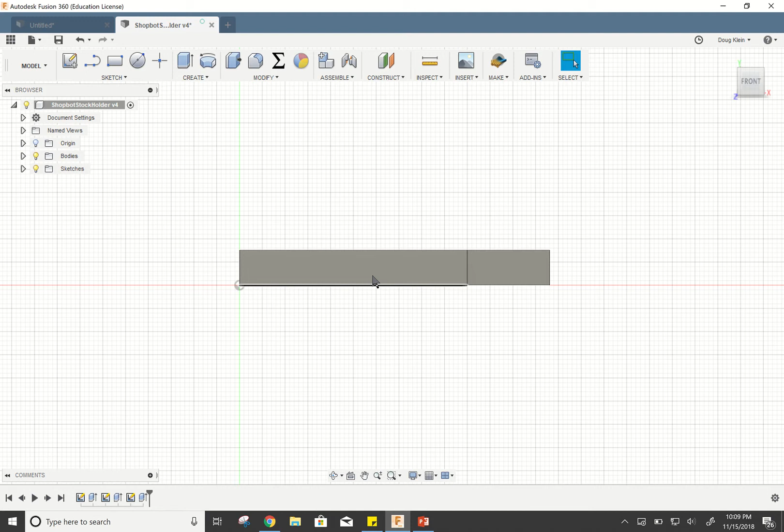We're going to develop a profiling operation for the Shopbot. To do that, I've drawn out my parts, and I have a 3/4 inch piece of plywood that I'm going to cut these parts out of. To do that, I'm going to make sure that all the parts started from the same plane and were all extruded the same distance just by looking at it from the side.

I'm also going to check to make sure that each of the extrusions are the same thickness as my material. And so 0.75 is my 3/4 inch plywood. I'm going to add an extra hundredth on that. And the reason is I want the bit to go all the way through my material and just scrape the spoil board as it's cutting along.

The other thing is the Shopbot works differently with the way it holds down material in comparison to our other mills. To do that, we're going to have to add a sketch to the top surface, and we're going to hold it down with screws, which are going to be in locations that we determine.

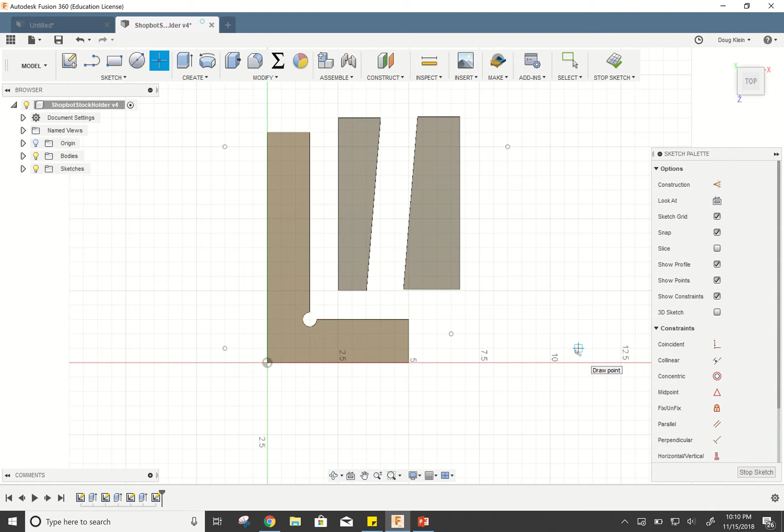It's going to be best to add these points about 1.5 inches away from our material. We don't want to have it be much more than that because we do want the surfaces between the two parts, as in the spoil board and the material, to be kind of tight. Once we have our 4 points that we are going to work with, we can go into our CAM and we can develop a setup for our part.

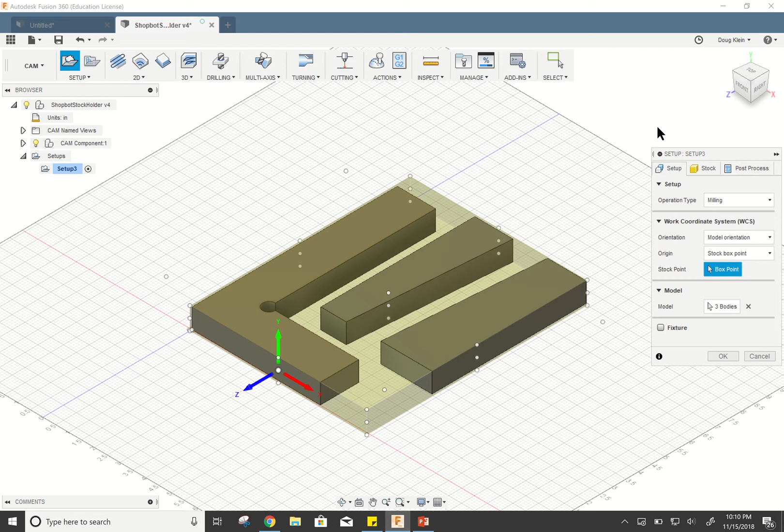To do that, we're going to generate a setup, and it comes out and it has our orientation, which is right like we drew it. And we have our work coordinate system developed right here. And we've got to get it set up so that our Z is going vertical. So we select a plane, which is that one, and it sets my Z vertical. And I'm going to select a point on that box right there as my origin.

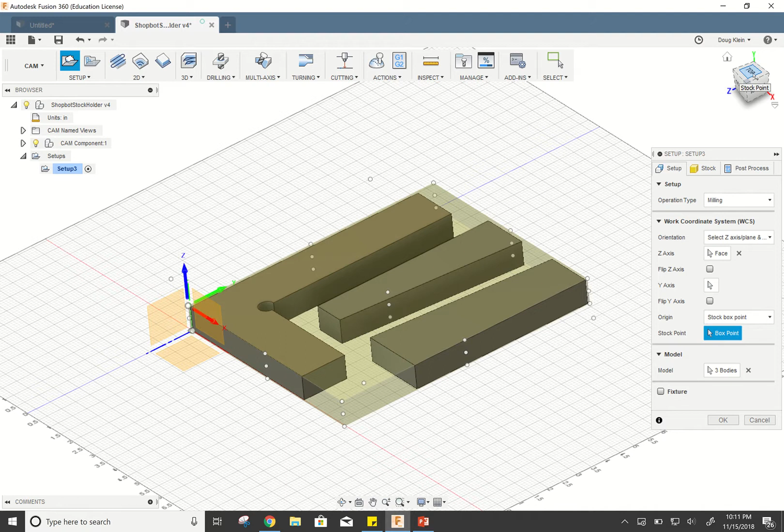Now, if you'll notice, this origin does not include the space that includes my dots. And so I need to move this origin out so that I include these holes where I'm going to pilot later on. To do that, I'm going to go into stock. I'm going to add stock to all sides, and I'm going to add 2 inches to each of my sides here. Maybe 2.5 here.

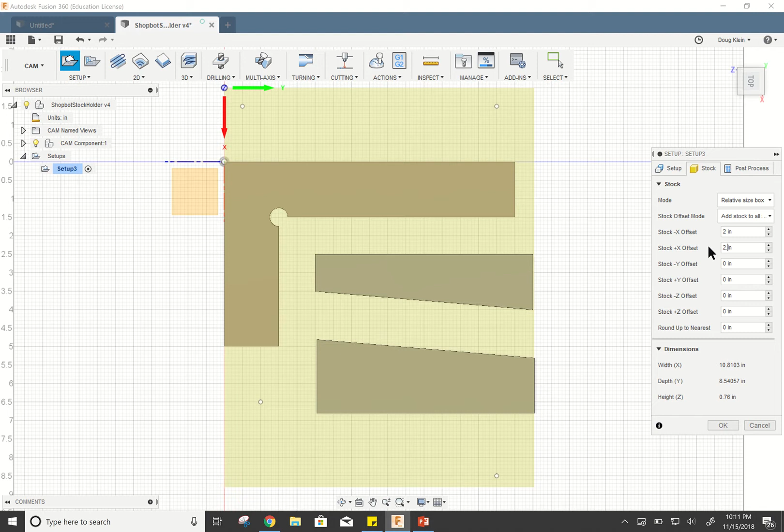Right, I add 1 inch on my Y, 1 inch on my Y, and it's going to tell me down here what the dimensions are of my material that I'm running with. And so I can go out and measure my material, make sure it is my 12 inches by 11 inches before I mount it and take it over to the machine. Once I select OK, this is the space that I'm working with.

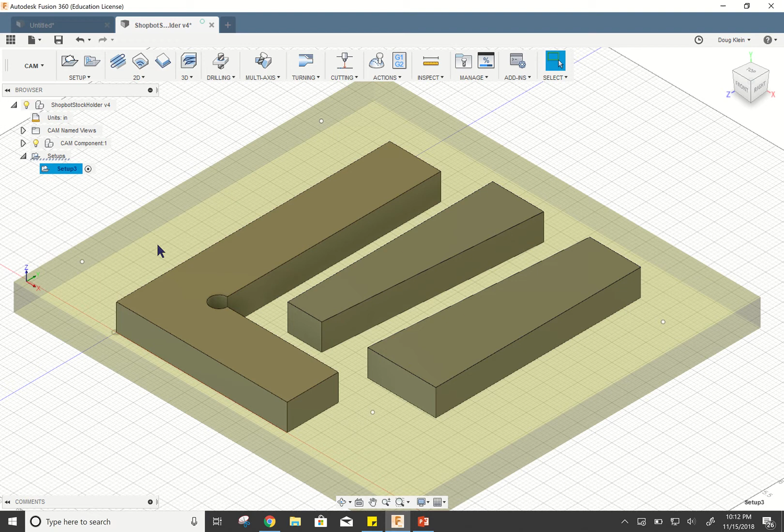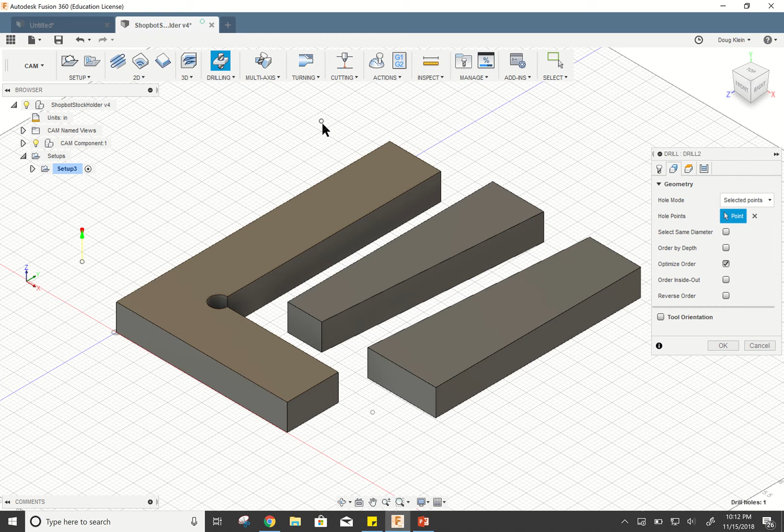And I've got to add some drill marks that are going to go on each of these points. I'm going to select a tool. I'm going to go into my plywood tools and select my spot drill. And for my faces, I'm just going to select points. I'm going to select this point here, that one, that one, that one, and that one. I'm also going to set the distance that it goes down to be -0.1.

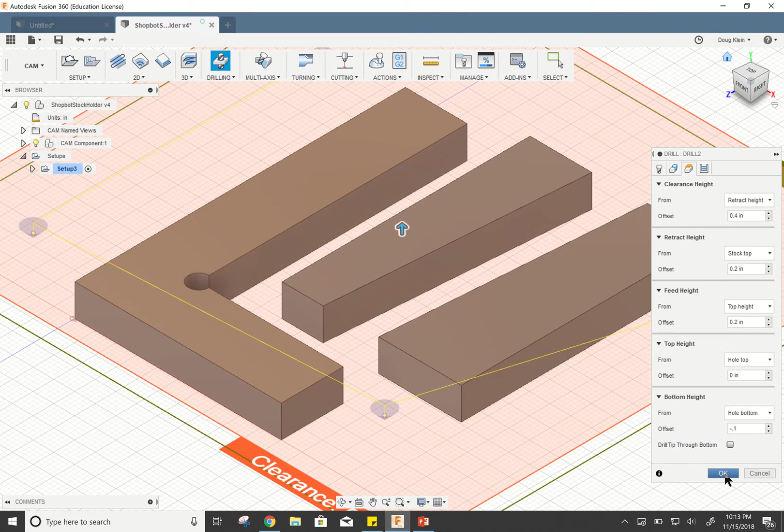And you can see the drill bit going in. If I look at it from the side, I can see that it goes down into the material. I'm going to select OK. I'm then going to simulate it just to make sure I'm in good shape. So we can run that process. See, that's going in, making everything happen, which is a good thing.

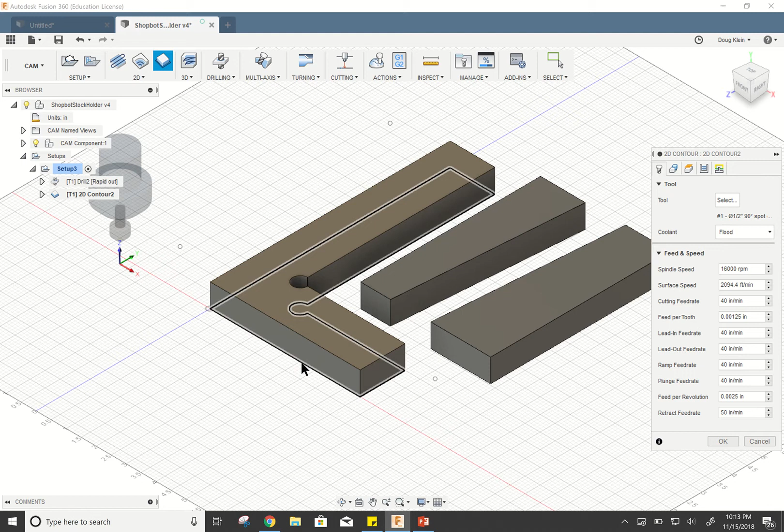Close my simulation. The next process that I want to have happen is I'm going to develop a 2D contour. And so to do that, I'm going to select the bottom face of each of these parts. And then I'm going to go over and change my tool. The tool that we're going to recommend you utilize for a plywood piece is going to be the 1/4 inch flat with a single flute. And that's going to allow for the chips to get out faster. And it's going to cut a little bit quicker for us and make less sound.

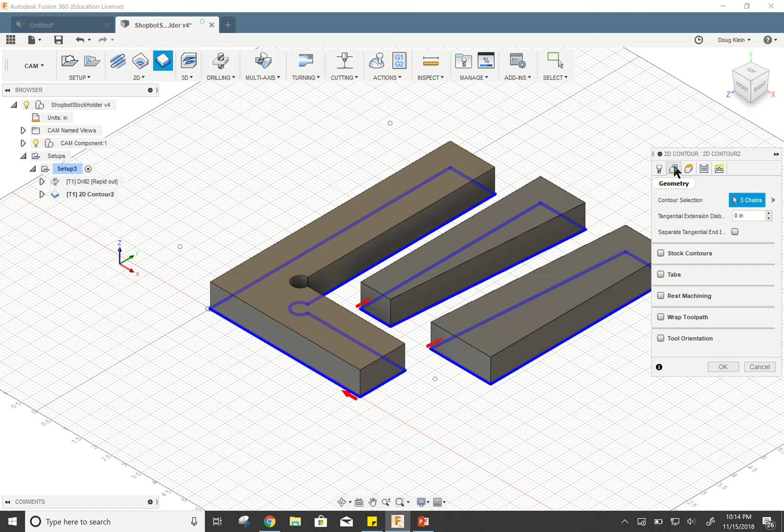I'm then going to look through, add some tabs. And the mindset on tabs is that each of these you're going to have to cut off when you're done, because we're going to cut this part out, and that tab is going to be holding this piece of the stock, and you'll see that better in a moment. But you really want to have about 4 per face. And so let's see here. So 4 inches is way too few. 3 inches is probably just about right. And so we'll be okay with that.

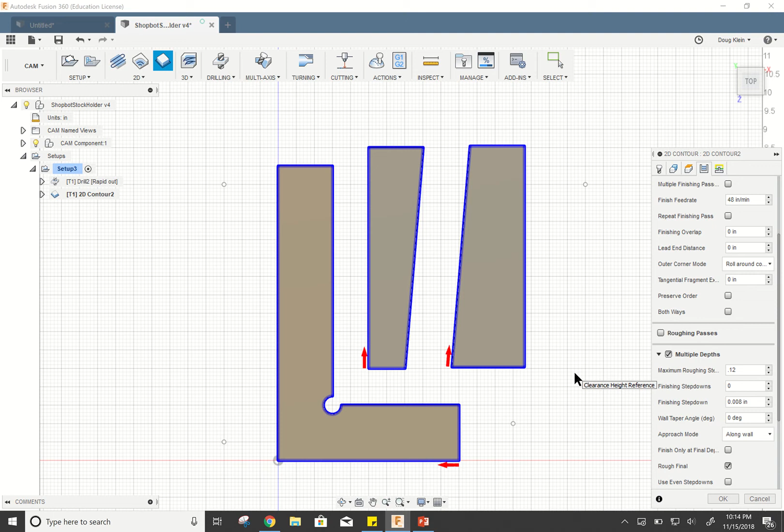I'm then going to look and develop multiple passes. So we don't want to cut all the way through at the very beginning. So we're going to go .125 for our depth. So it's going to cut down 1/8 of an inch, go all the way around, cut down 1/8 of an inch, and so forth. And we're going to select OK. Now let's check that. So we can see that it's going to go down slowly on that part, and it's also going to leave a little tab in each of these locations.

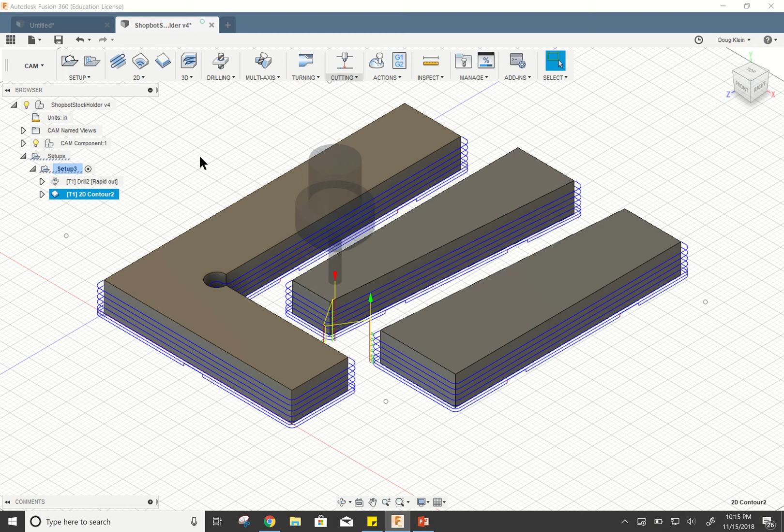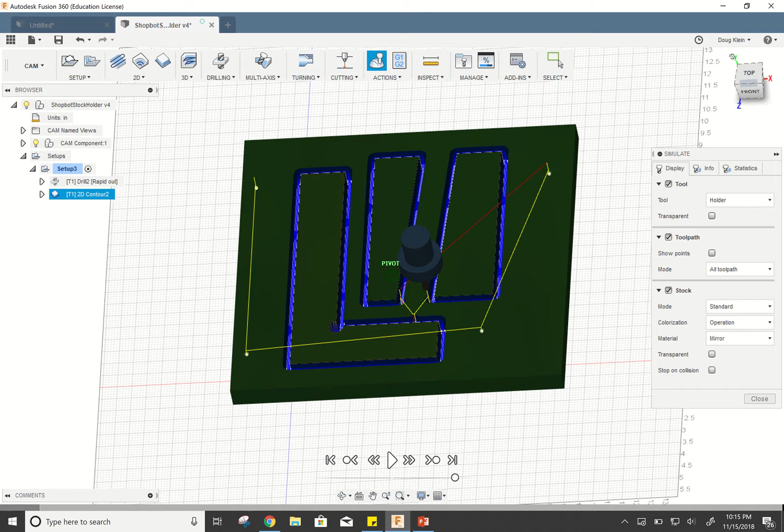So let's check the part out. We're going to select setup 3, and we're going to simulate it. And we'll run the whole thing. I can actually speed the simulation up here if I want. So we can see it's cutting out that middle part, it's cutting out my next part, and my last one. And if I look at it from the top here, I can see that I have each of my parts, and I also have left these tabs in for it to be worked with. So if I have that, I can be very confident, one, that it's not going to hit my screw holes that I use to hold down, right? And that my part's going to cut through all the way.

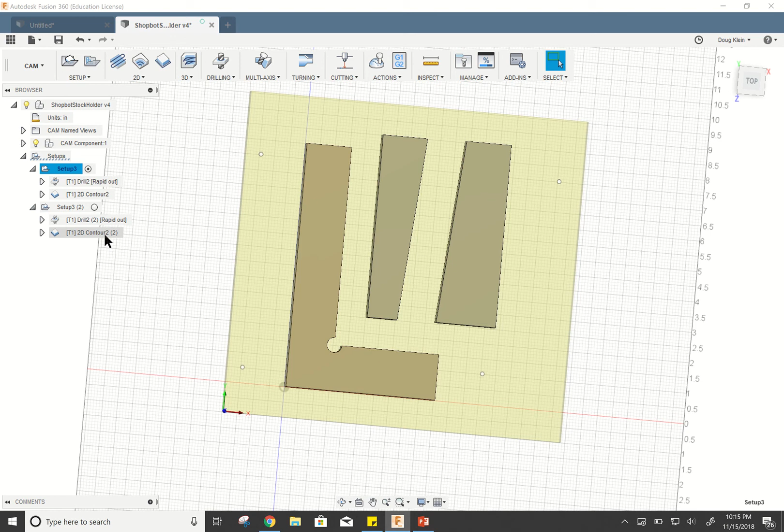The last thing that we really have to do is we have to duplicate our setup here. So I'm going to duplicate that. And you'll notice that over here I have my drill process, I've got my contour process. I'm going to delete my drill process out of my second one, and I am going to delete my contour process out of my other one. And the reason is I'm going to run this as a separate process on the ShopBot. That way I can run that part, then put the screws in to hold my material down, and then I can go ahead and do my contours. Make sure to check that with somebody before you run on your machine, but that should work for you as far as a profiling setup.